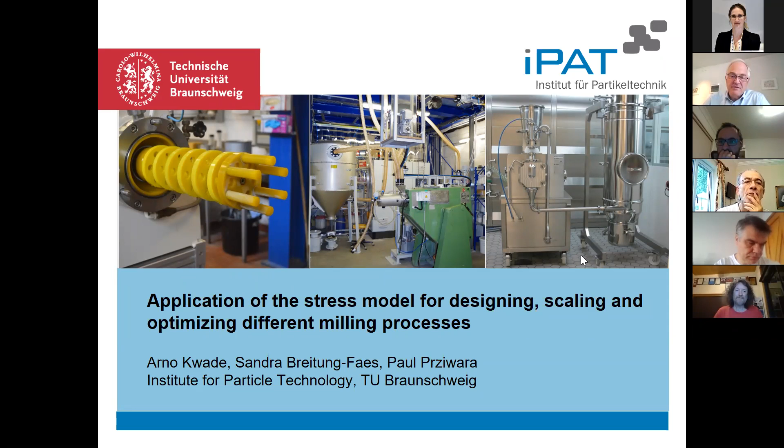And I think more work on maybe single particle stressing, more on population balance modeling and so on, that maybe I will present in the future, mostly also connected with this stress model. So that means today I want to say a few words. I think it's not something special, but as an introduction to energy efficiency and production capacity. Then I would like to present shortly our mill-related stress model, and then how this can be applied for scaling rotary impact mills. That is a work by Michael Junke together with some students of us.

And then we come to the product-related stress model, and also I have two examples there how to use this one. One is for what we are almost always doing, using wet stirred media mills, and predict the result. But also I want to show you how to optimize dry ball milling processes. It's more or less also a stirred media mill in this case, but we also have done some work with normal ball mills, or we're doing it very intensively in the moment. But I think the most complete results we have for this vertical ball mill with a stirrer. And then I come to the conclusions and the outlook.

Now, a few words to start. Sometimes, I mean, it's not so much in mineral industry, but in other industries, it's important to explain why it is really important to increase the energy efficiency, and that means to decrease the specific energy consumption. And it's not only because we want to have low energy costs, it's also because if we keep the power consumption or the power input of the mill the same, we can have a really high production capacity, like shown by this equation here.

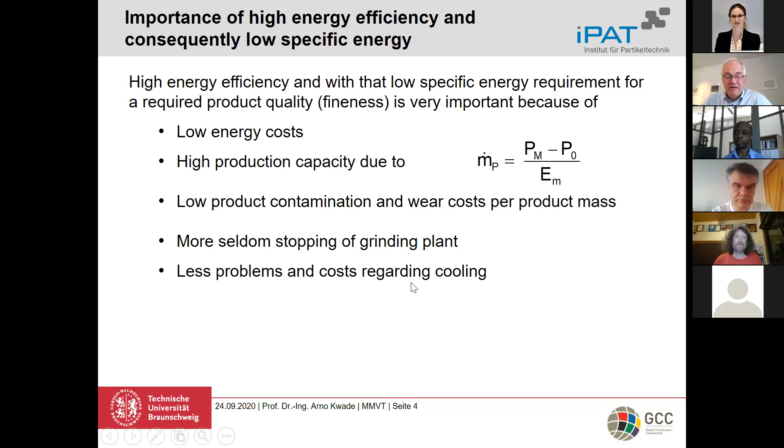So what is the energy doing, or what is the flow of the energy from the motor at the end to our product particles? If we put the energy into the motor, first of all, some of the energy we lose in the drive system. Usually we measure that by the so-called no-load energy or no-load power. It's called here energy, but usually the motor is given some power, and power times time is energy. And so this is something what I think very often is not really looked at, but maybe from the machine supplier side, that should be also something which can be optimized in the future to decrease our CO2 footprint.

So that is then the energy which is really going into the mill chamber, and this energy which is in the mill chamber now is not only used for really stressing the particles. A lot of the energy, especially in fine grinding, is used for the transport of the product particles, for resistances, also friction inside the chamber, and also maybe deformation and wear of the parts of the machine.

So only a certain part is really transferred to the particles. And this part, for example in a jaw crusher, is much higher than in a jet mill or an impact mill, where we have very small particles. Then the question is how this energy, which we really transfer to the particles, can be transferred into a fine product with very high specific surface, for example.

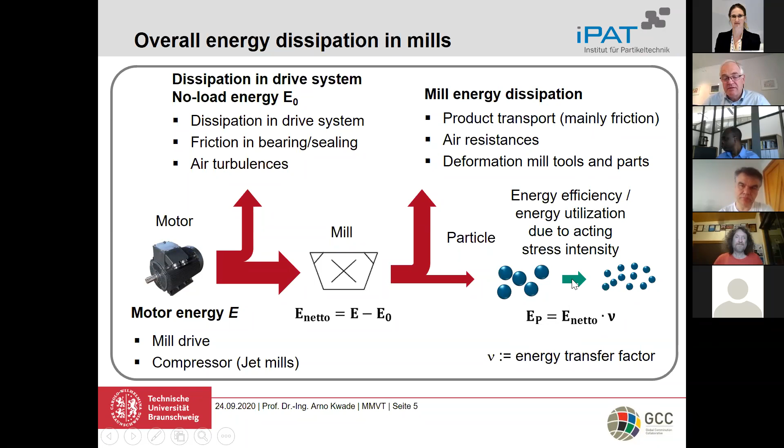Very important is the stress intensity, because this stress intensity decides how effectively we can use this energy.

One example - there are a lot of old results, not new at all, from Schönert, Schubert, and other colleagues, King and so on. They measured single particles with different stress intensities by compression and also by impact. Druck means compression, Prall means impact. You see that the energy utilization - the energy as specific surface increase divided by the energy used - is higher for compression than for impact, and it depends on the particle size and also on the stress intensity. So energy utilization depends on the kind of stress, the stress intensity, and also the particle size.

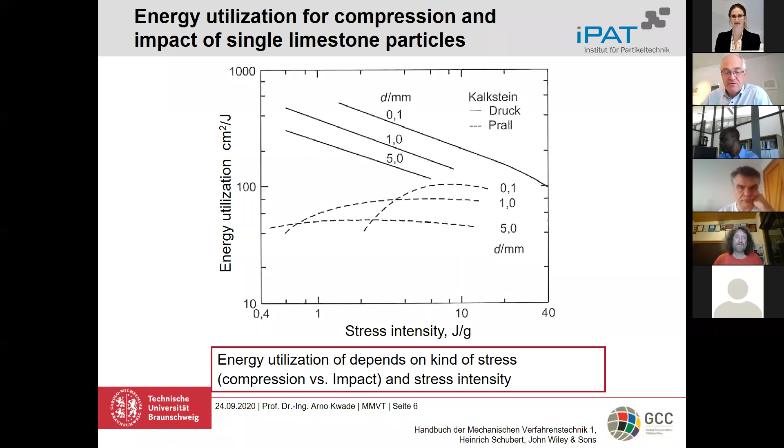I think this is a very basic and important starting point. And then I come to the mill-related stress model.

What's important to say is that this model is not only valid for wet stirred media mills, where we mainly used it, but I think this model can be used for all kinds of mills, because every mill has something in common: we have individual stress events, and in each stress event we stress particles with a certain kind of stress and a certain intensity of stress.

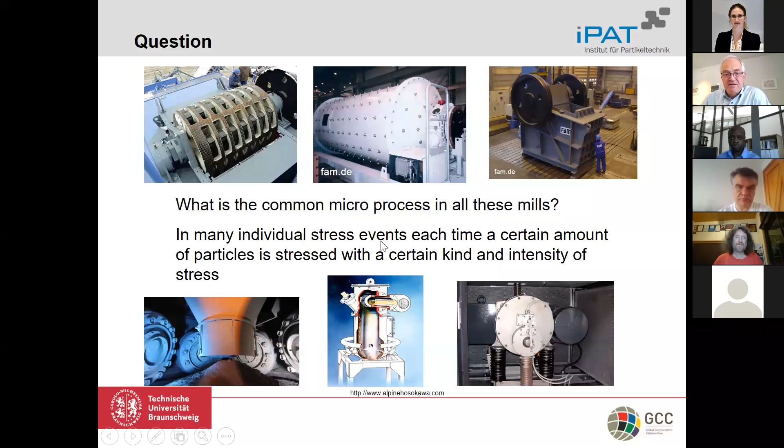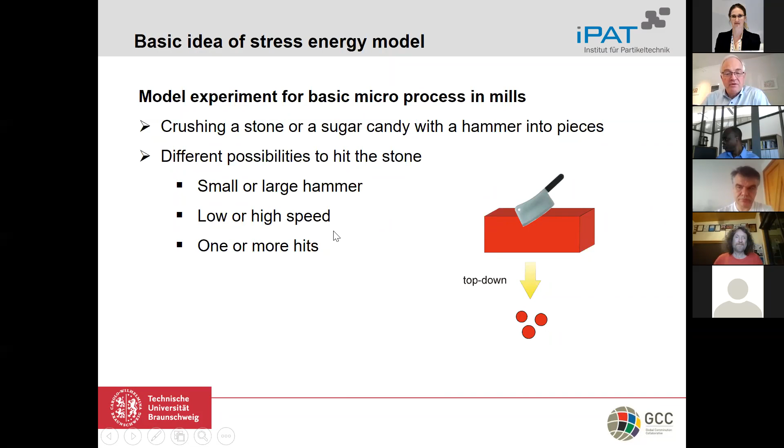So we thought it could be a really simple model experiment. We have one particle, we have a hammer or something like that, and then the question is how we stress the particle. Do we do it with high energy or low energy - meaning a small or large hammer? Do we do it with low or high speed? This also changes the energy. And do we only do that once, or maybe more often, maybe also with less energy per particle? All that decides, in the end, how efficient we are in our comminution process.

To have a closer look, we said maybe we should have two different views on the process. One is from the mill - what is the hammer doing, or what is the mill doing, how often we stress a particle, meaning the frequency of strokes or stresses, and how strong are the strokes, meaning the force or the energy in this case of the hammer, inside the machine.

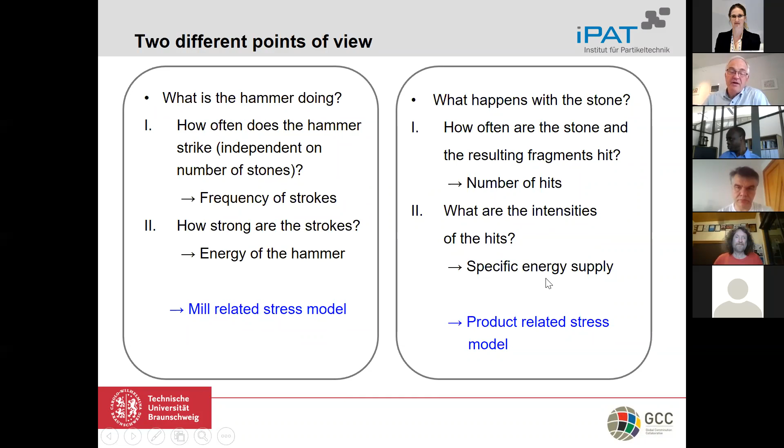And on the other side, it's how we do that, or we have a look at the product - what is coming out and what stresses are acting on the product. That means how many stress events a certain mass of product has achieved, or the number of hits on a certain particle and its fragments, and what the intensities of these hits are. Intensity always means energy per mass of particles which are stressed - something like the specific energy in a single stress event. We call that the product-related stress model.

So coming first to the mill-related stress model, which I think most of you know. We, or others like Schönert, said the type of stress is very important, then the stress frequency - how often stresses or stress events act in a mill. For example, in a jaw crusher it's very seldom; in a rotary impact mill it's very often. Then the stress energy, the energy we can provide to the particles - this is independent of the particle size and the material in the mill. It really only describes the operation of the mill.

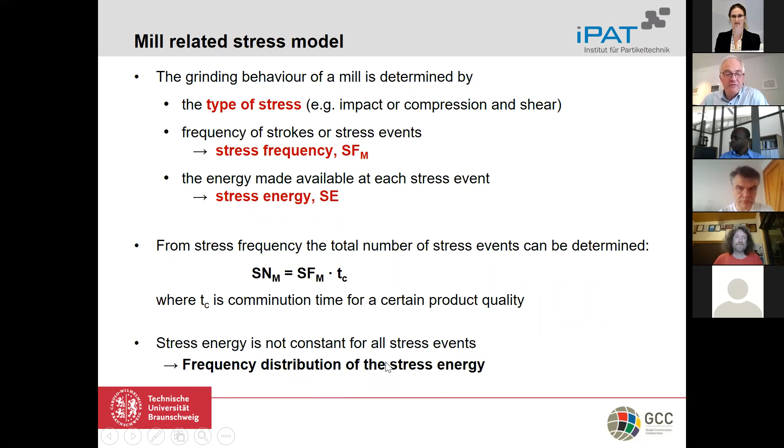The best we can do is use a frequency distribution or a cumulative distribution of the stress energy to describe the behavior of such a mill. That is such a model distribution - you have a frequency distribution of this stress energy.

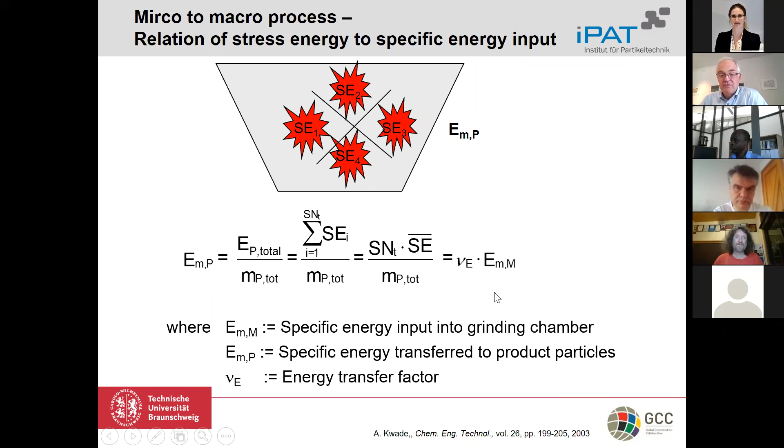Okay, now how can we use it? There's a sample - I like this example because it's relatively simple. Michael Juhnke from Novartis, I think maybe some of you know him. He gave a plenary lecture, I think at ESCC last time, or at least in our circle, but he is also very active in the comminution field.

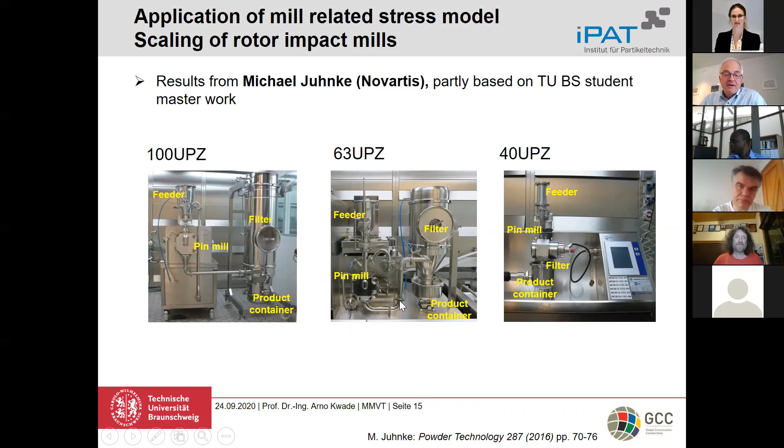His purpose at his company was how to go from small mill devices to predict the result, or how to operate the large production mills - large for the pharmaceutical industry, though still very small for the mineral industry. So the question is how to do that.

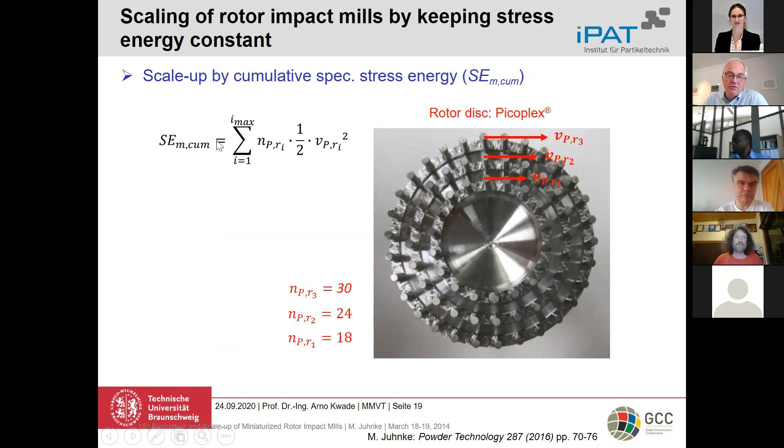So that means we need a better description, the full stress energy distribution. But then he calculated a mean value from this full distribution. He counted the pins, calculated the stress energy for each pin, multiplied it, and came to this mean or cumulative value for the stress energy.

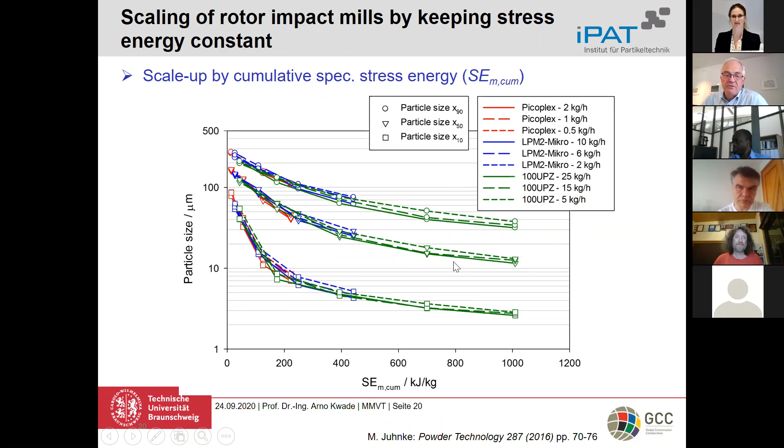With this energy, he correlated the curves and got much better agreement. But then he said, to operate the mill with these different stress energies, you need different tip speeds, 129 meters, 118 meters per second, and this gives some other problems. So he talked to the manufacturer, for the Hosokawa Alpine, and they redesigned these rotors.

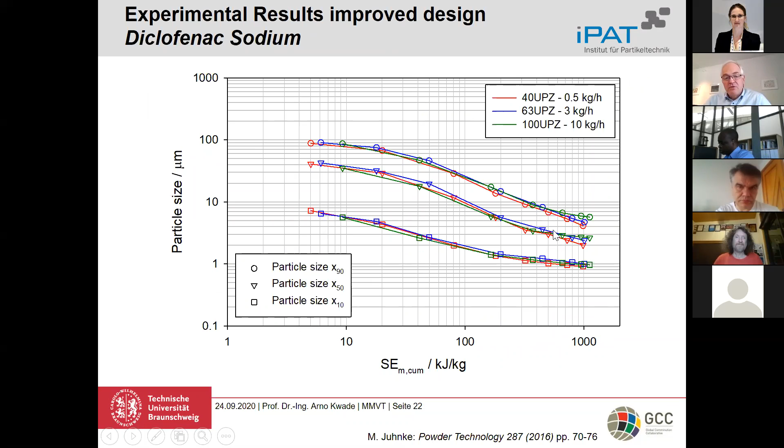So that at the end the tip speed is very similar in the three mills, to get the same mean stress energy. With that, you get even much better correlations for the three mills. Now he has a really nice tool, to run with a very small mill but predict what happens for larger mills.

Okay, coming to the product-related stress model. In this case, we now relate the frequency of stresses to a certain particle, so we have the stress number per feed particle, and we relate the stress energy to the mass of the particle, or force to the area of the particle. So we come to the stress intensity.

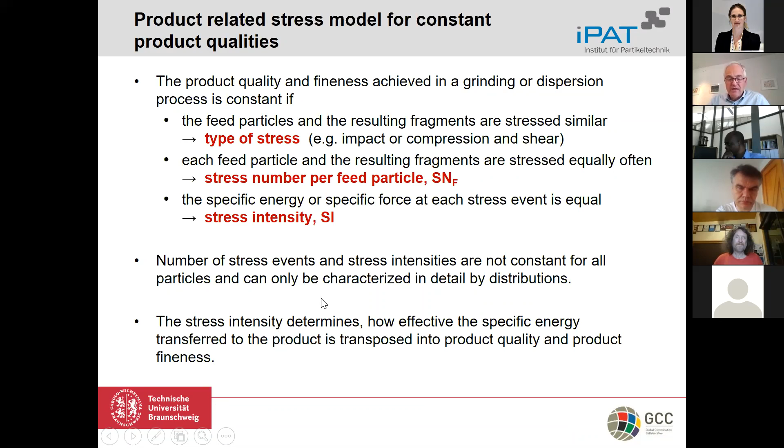These are two related characteristic values, but again we have a distribution of the stress number per feed particle. Not every particle gets the same number of stresses, and the stress intensity also has a certain distribution across all the stress events. In the following I will work more or less with characteristic values. The stress intensity determines how effective the specific energy is transferred to the product, as we've already seen regarding energy utilization in the basic investigations at the beginning.

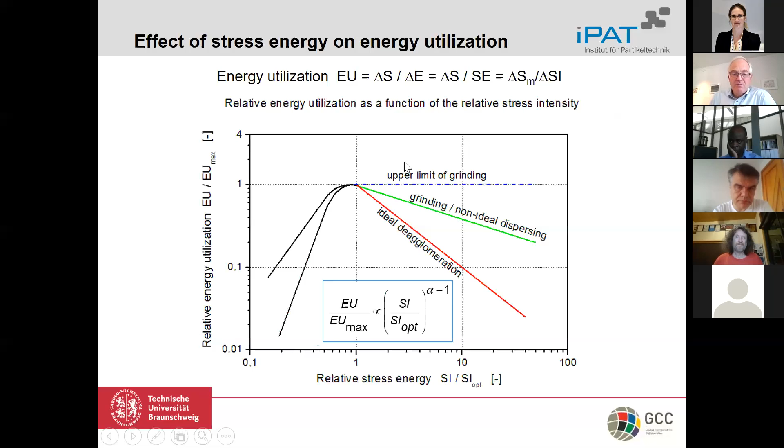We have the maximum energy utilization, and then we have a decrease. So that means we should operate our mill maybe a little bit higher than the optimum stress intensity to have a really nice or really high energy utilization. This was also found for other materials, also from basic research.

These are two figures I got out of the Handbook of Powder Technology, which are results from Schönert and Rumpf, and also from Unland. They all could show that the energy utilization depends on the intensity in case of an impact milling. And in this case, this is for a compression of a bed. You also get a certain maximum energy utilization depending on this stress intensity input.

That means there is an optimum that we want to find and which we want to use at the end, to get the minimum of specific energy, but maybe also the maximum of throughput and so on, like I said at the beginning of my presentation.

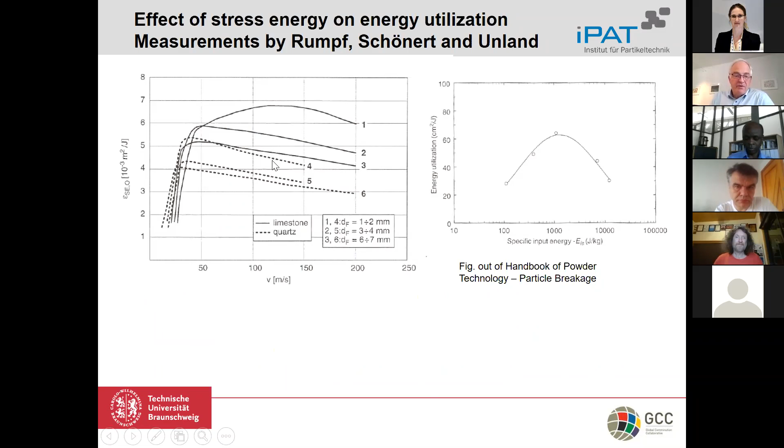If you use this relationship shown here, then you can also transfer that into a relationship with the specific energy, because we want to have usually the same product quality with a certain process. That means the specific surface increase would be constant. And then we come to this equation where we say that the specific energy divided by a minimum specific energy should be a function of this ratio of the stress intensities.

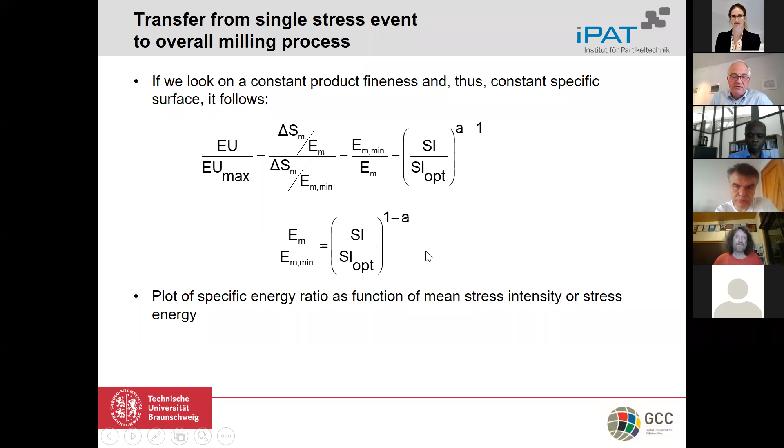Now for, in this case, our stirred media mill, as an example, the stress energy can be determined by the kinetic energy of the beads, which is a function of the volume of the beads and the density. And the volume is a function of the size of the beads to the power of 3, and also a square of the tip speed. So it's a very simple equation for the kinetic energy.

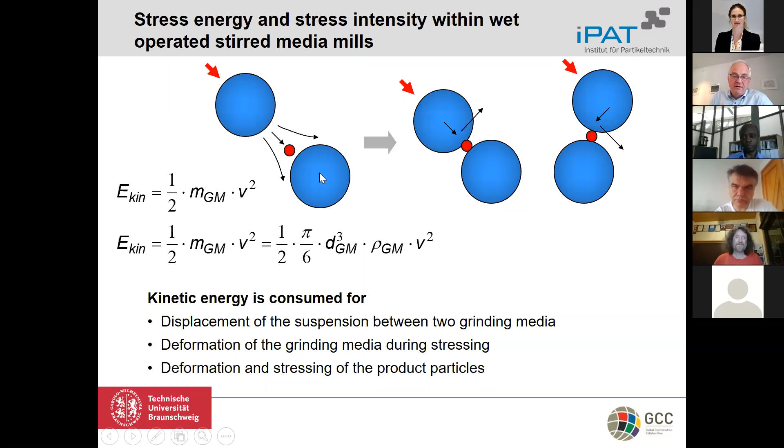This kinetic energy is usually used for the milling or the stressing of the particles, but also for the displacement of fluid or what we have between the beads, and maybe also more or less the deformation of the beads itself. Now if we assume that there's no deformation of the beads, and that the displacement of the fluid can be neglected, then we can say that this kinetic energy is decisive for stressing the particles.

What I'm showing here is results from 4 different experiments where we kept the stress intensity or stress energy almost constant. What we can see is that if we want to have a certain particle size, we need a certain specific energy, even if we change the density of the balls or beads, the size of them, and also the tip speed, we get the same specific energy.

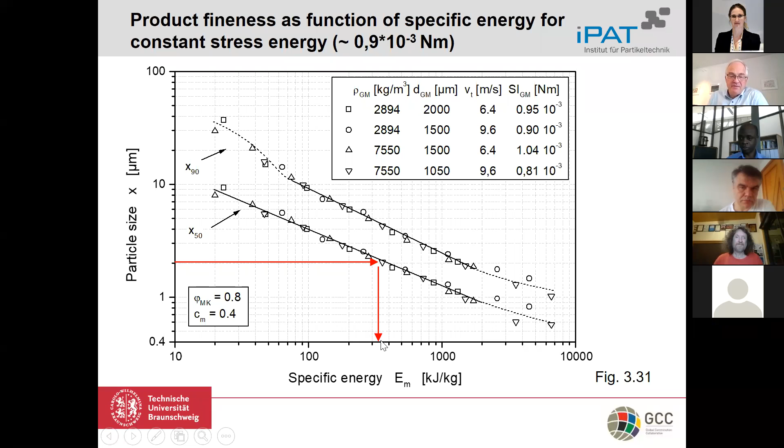Now, if we plot the specific energy as a function of the stress intensity, then we come to this plot which has this optimum curve, which I think is almost always shown.

What we want to do is now to work in this region here where we have very small specific energies. As I said, this is in this case only valid for the case that the media speed is proportional to the tip speed, that the stress energy can be a measure for the maximum energy, and that we don't need the full distribution, that only one particle is stressed significantly. So that means the stress intensity is almost independent of the size of the beads.

I think this is why we are very lucky for this wet milling. I will show you later the case for the dry milling. There we have to consider the mass between the balls, so that is then not so easy like it was here for the wet milling.

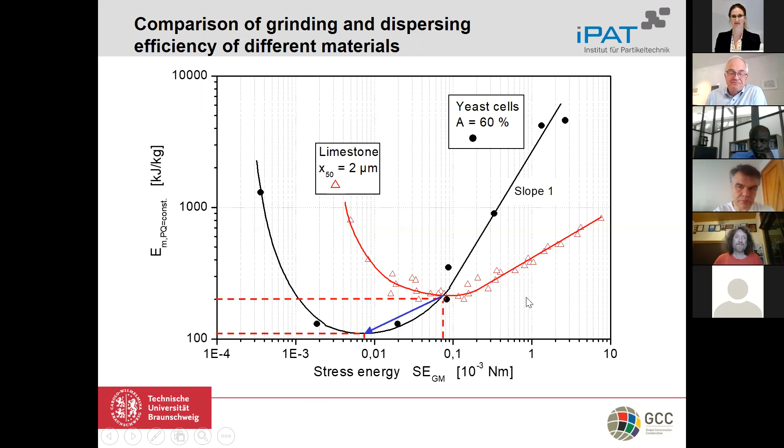Okay, now how to use this model. I will proceed with wet stirred media milling, and then come to dry ball milling. I think I have to hurry up a little bit to be in time at the end.

For stirred media mills, what's nice is that you have a lot of different designs. I think most of you are coming from the minerals industry, so you really know the ISA mill, shown here. But there are also vertical mills on the market, increasingly in the mineral industry, and other very specialized mills for pigments or other ceramic materials. The question is, what is the grinding behavior and efficiency of these different mill designs?

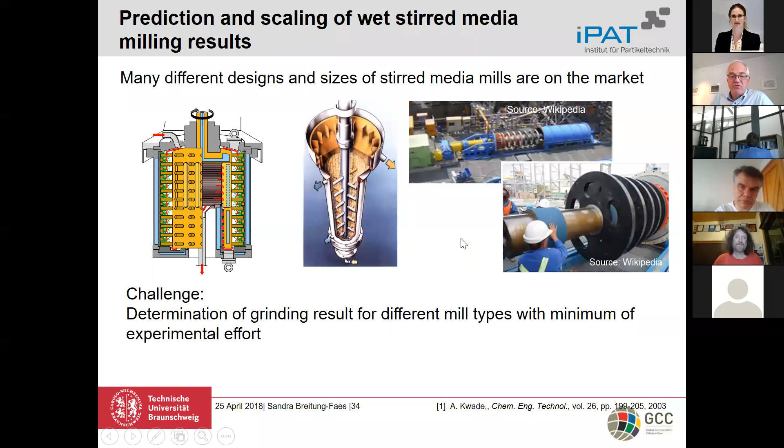You can run experiments all the time, but then you may have the issue that you can only run the experiment in a small mill, while you want to know what happens in a really large mill like this large ISA mill. So you also have to predict the change with geometry. How can we do that with a minimum of experimental effort?

What we usually do is first estimate the distribution of our stress intensities, that is, the stress frequency for different stress energies, but as a cumulative function in this case. From that we can define a median value or also a mean value, and we use this for describing the effect of the different mill designs.

If you want to do it more exactly, you need the full curve, and then you can do it by population balance modeling. We have also done that to get a full particle size distribution at the end, but here we will do it in a simpler way.

We found that there's a certain factor for the mill describing how the mean stress energy depends on the mill size or mill geometry. If we have the mean stress energy, we can also calculate the stress intensity.

We found that for very high solids concentrations, we also have to consider the mass between the beads, so it's not so easy that we can use only the stress energy.

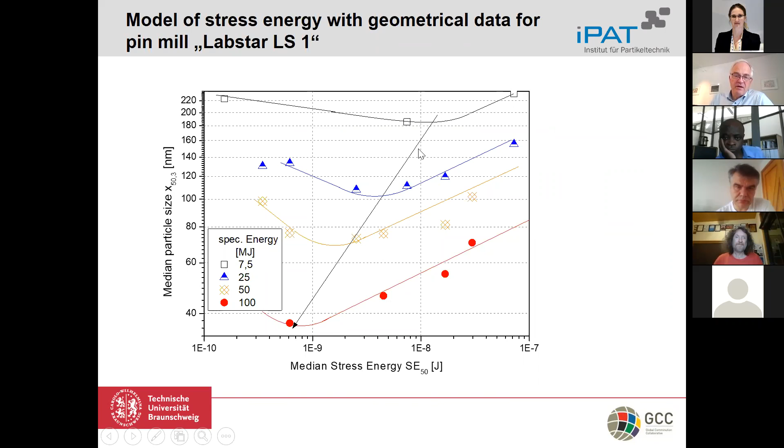Then we plot, so from here you get the optimum value, that's always the minimum. We said, okay, that's the optimum value. This optimum value is then plotted here on the x-axis, and we said at the optimum stress energy, what is the minimum, or the median particle size we got at this point?

Then we plotted this for the different materials. We found that we get a nice correlation for zinc oxide and alumina in this case. The question was, can we define a certain parameter so that we are always on one line, meaning we can calculate in advance what the optimum stress energy is?

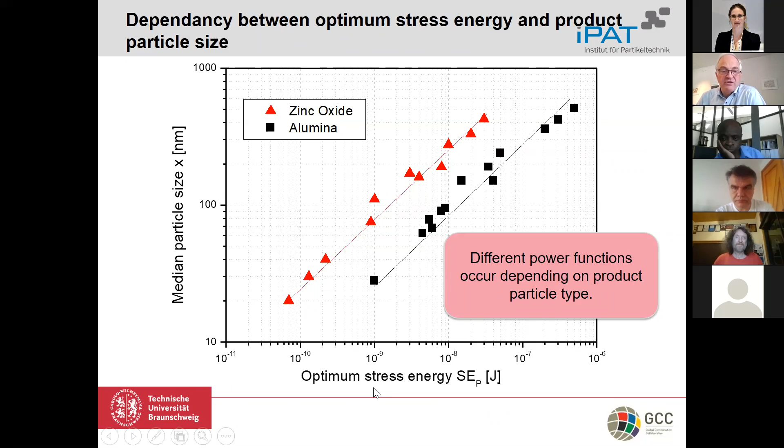Sandra Breitung-Fäß looked into this—we did some work together with Peukert on the grinding limit—and we found that this depends on a size x min, as we called it, and this x min depends on some other material parameters I'll show on the next slide. It can also be estimated that it depends somehow on the global compression strength of a material, if it's really large, not depending on the size in this case, and on the size of the particle.

So we said, okay, the energy which we transfer to a certain particle divided by the strength of the particle is the stress energy divided by the volume of the particle and the density—but we simplified it. It's a proportional sign here, sorry.

Times 1 divided by the strength of this material—this is always the stress intensity divided by the strength. So that means how much higher is the stress intensity compared to the strength of the material, and this was a function of the x50 value divided by the x-min value.

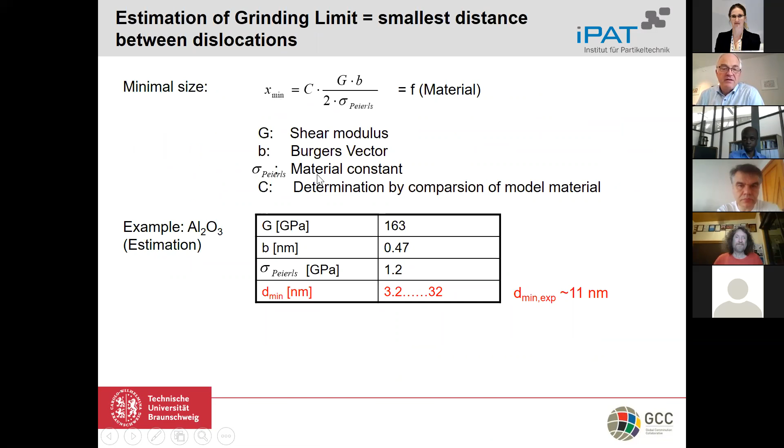This x-min value is the minimum particle size which can be achieved. That depends on the shear modulus, on the Burgers vector, on certain material constants, and what was done in this joint work—there's a publication where you can have a look at it.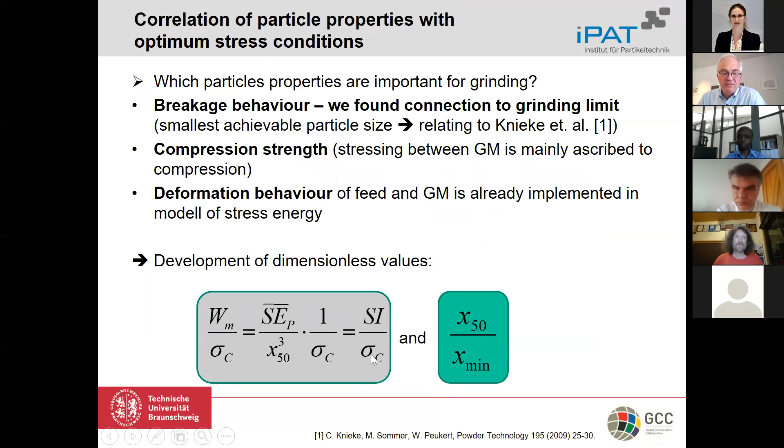But for us, it's better to have the strength on the other side. That means this one was then shifted to the other side to determine the optimum stress intensity, and this is this curve. You have the optimum stress intensity as a function of the maximum global strength of the material times this minimum value to the power of 3, divided by the size we want to have to the power of 3. If we plot that, we get this straight line. So it's somehow a global curve.

And also, if we calculate the right stress energy distribution, then we can use it for different mill designs and mill sizes.

Okay, so that was very nice. So by knowing the material properties, now we can decide what is the optimum stress intensity. This should be not only valid for stirred media mills, it should be valid also for other mills, but we haven't really checked it. It's ongoing work.

And this compression strength, we found that we can also use to estimate this minimum particle size—it's only an estimation, not very precise. Then you have to also get all the material parameters I showed you before, but from first estimation, I think this line worked nicely to get this x-min.

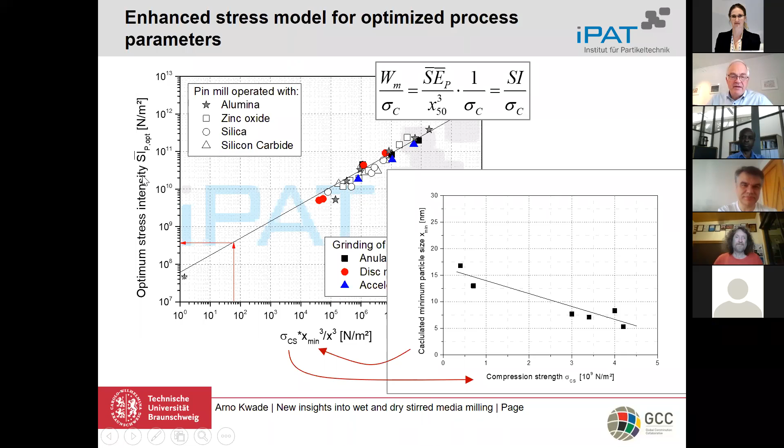Okay, so that was one very nice curve, and then we thought about, for this optimum stress intensity, we should need a certain number of stresses to come to breakage at a certain fineness, you know, normally maybe only once.

And this turned out also to be a nice correlation. So depending on this optimum stress intensity to achieve a certain fineness, each optimum stress intensity means also a different fineness at the end—you need a different number of stress events, and this was also one line for different materials and different mill types.

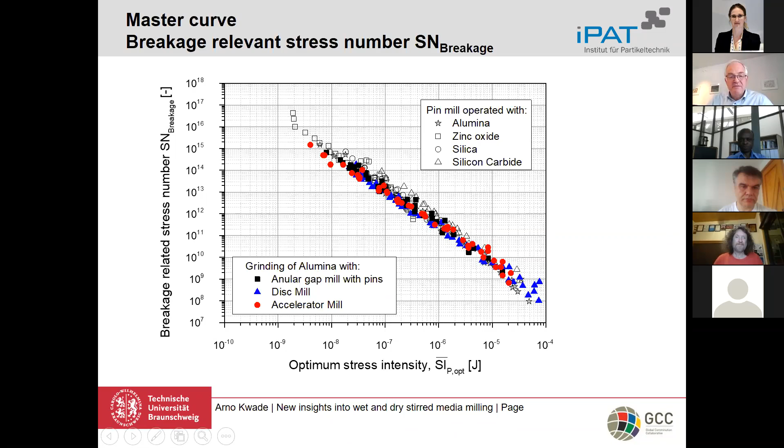So we have two master curves, and with these master curves, at the end we can calculate the stress number for a new operation mode or operation point. So this is the breakage number for the optimum point, this is the optimum stress intensity, and this is then the stress intensity for the new operation point.

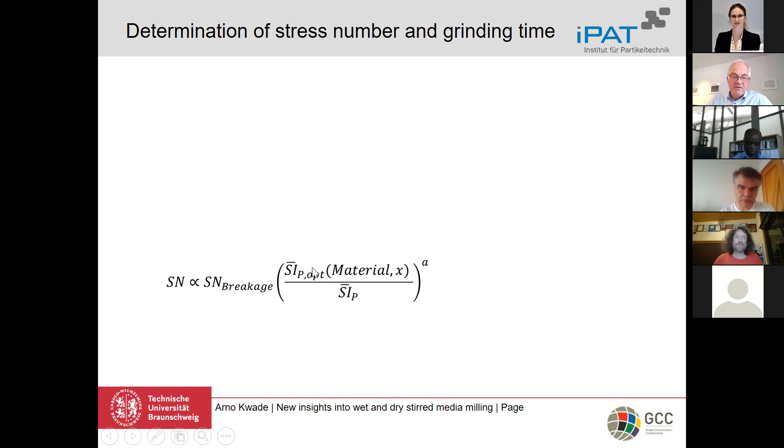So how can we use this equation? We can first determine this optimum stress intensity, like I've shown you by this curve here, with some more points in this case, based on this overall strength and so on—so one direction.

Then we can use the second master curve to determine this breakage number for this optimum point, and then we can put in the stress intensity we want to have a look at. We still need this factor alpha, the power of this equation, and we found that this depends on the Young's modulus. Otherwise, you have to run an experiment to find that out.

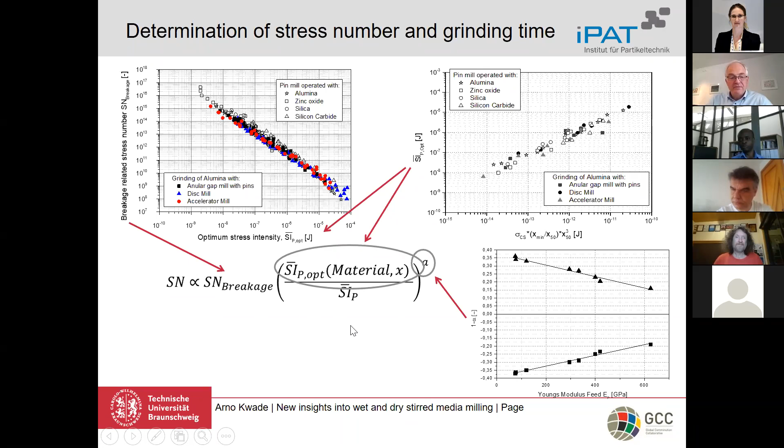With this stress number, now I cannot show you everything because then the time is over, but we can now determine the stress. We can predict the grinding time and also the specific energy consumption. This procedure is shown here: first, we determine by the geometry the stress energy distribution.

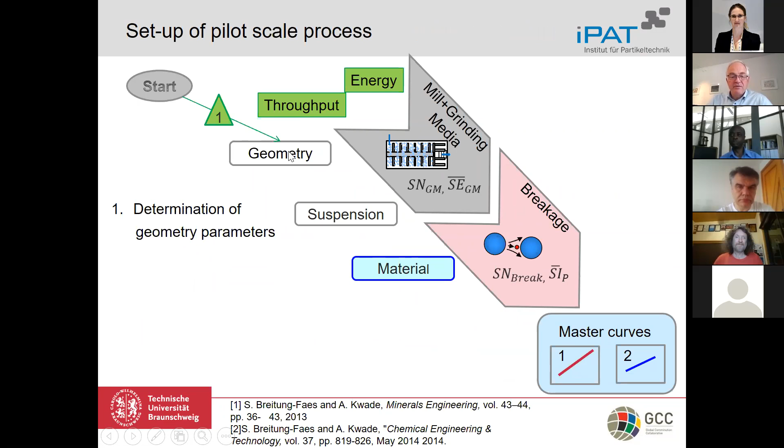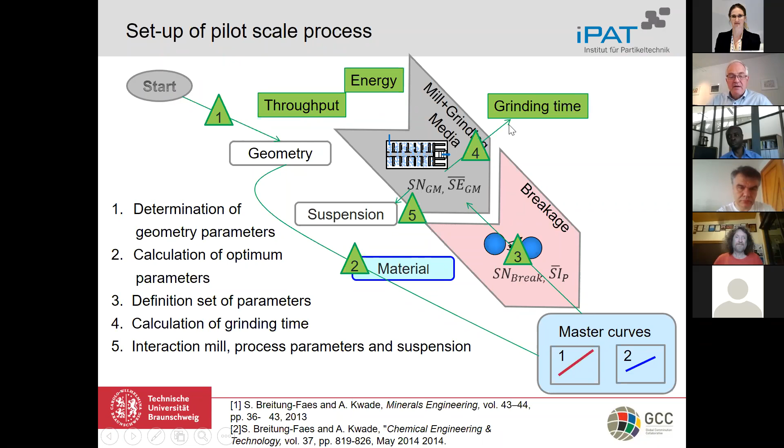By the material parameters, we come to the master curves and can determine the optimum stress intensity. From that, we can get the number of stresses we need. And then we can calculate the grinding time and also the specific energy consumption.

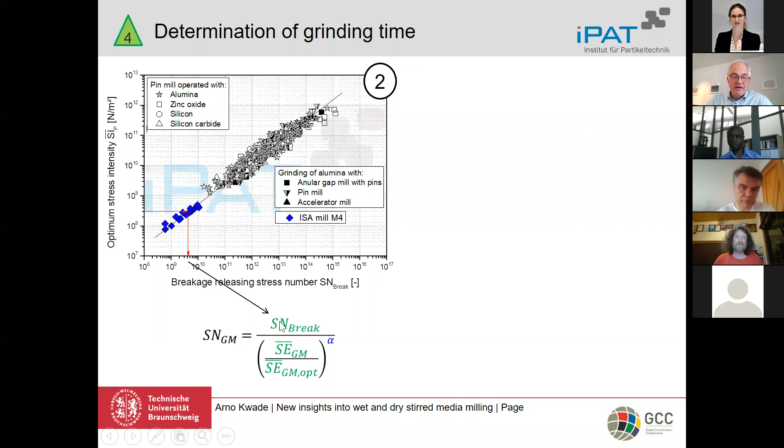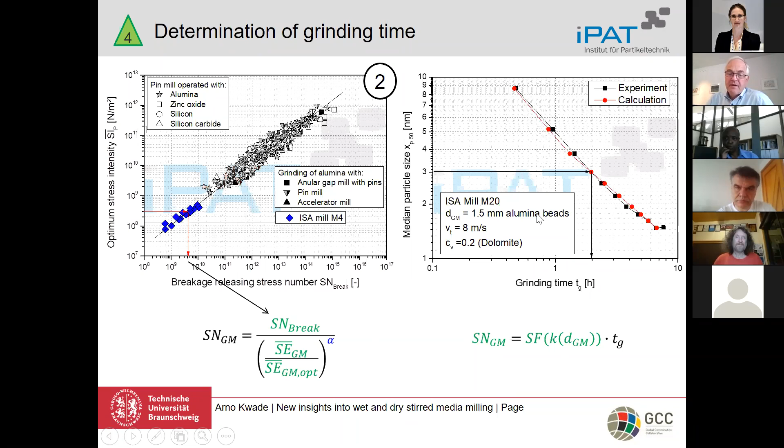Then we can determine the breakage number, or the number of stresses, with the second master curve, and then determine the grinding time by this correlation. This was really in line with the experiment—this is the M20. We didn't make experiments or use experiments here for the prediction; it was only calculated based on this master curve, and we got the M20 results really nicely.

We can also predict the specific energy consumption, but then we need some information on how effectively the energy is transferred to the grinding material by the beads, with this factor, and also whether there is some damping. It would be too complicated to explain now how we did that, but it works.

But I'll show you more in the following. It's on stirred media mills, work done by Paul Przwara. Maybe some of you know him, but he is now in industry working with stirred media mills—now with wet stirred media mills.

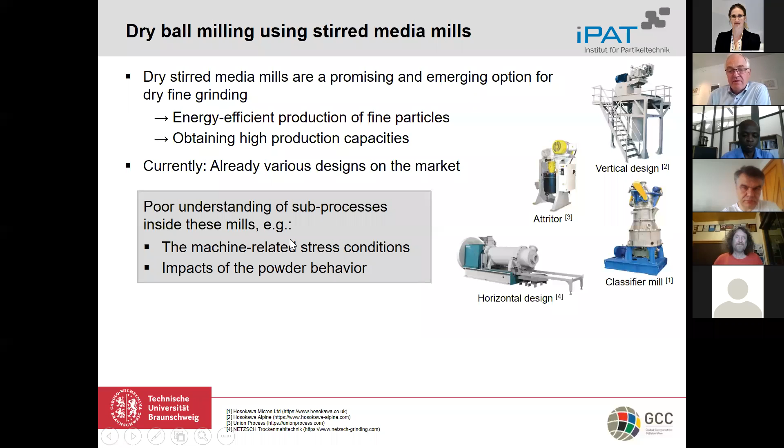What he was doing was to also have a look at dry stirred media mills and how we can optimize them, but also how we can predict the fineness of different operations of these mills. Up to now, when he started, there was a poor understanding of what really happens in such mills and what the stress conditions are, how power is transferred to the material, and so on.

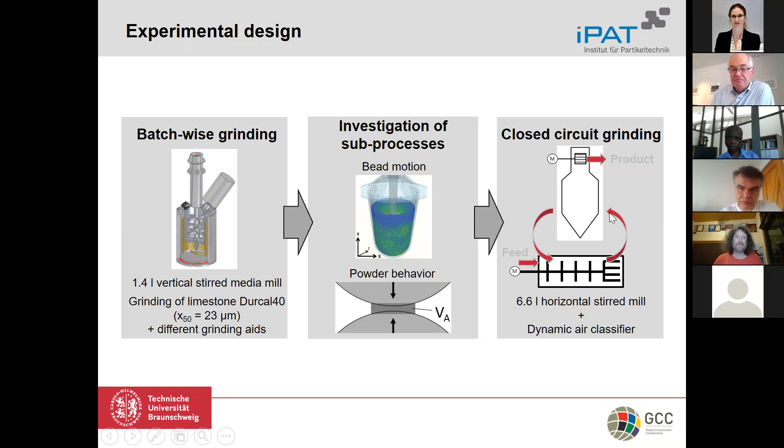We started with this smaller batch-wise vertical mill. Then we had some investigations of the sub-processes, what happens really between the beads, and at the end we came to a pilot line or pilot-scale closed circuit grinding. I think because of time I'll skip this in my presentation. I only wanted to show you the results with the vertical mill, because it's really nice to show how the stress intensity has to be calculated and how we can use this in this case.

So for different tip speeds and different grinding additives, we get different results. This is one grinding additive, heptanoic acid, and depending on the grinding additive, we get different flow properties—that's shown in the next slide. If you use a different one, like glycol in this case, we have a much higher particle size, so we need much more energy to achieve the same fineness.

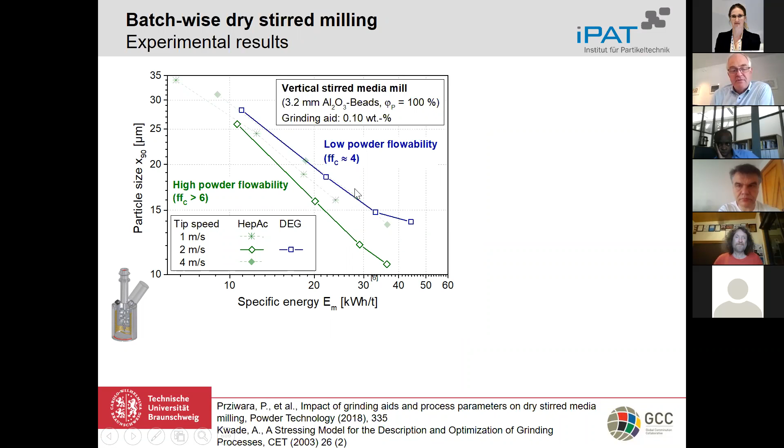In another mill, it can behave differently, so powder flowability is very, very important. I think he did a lot of very nice work on that. We also just published a review, for example in Powder Technology, on all the work done until now—I think it's important for dry milling in such ball mills.

Then he said, okay, let's try what we did for wet milling—use this simple equation for the stress energy, knowing it probably doesn't work, but first have a try. In this case, he wanted to produce a 20 micron X90. So he looked at the specific energy and plotted it as a function of this term, and you see it's not a nice curve—the points are all over. So that doesn't work. Now the question is why.

There can be two reasons. One is that the stress energy may not really be defined by this equation. The other is that there's a certain mass between the balls or the beads, and this mass changes with the size of the beads and also maybe the flowability of the product, and so on.

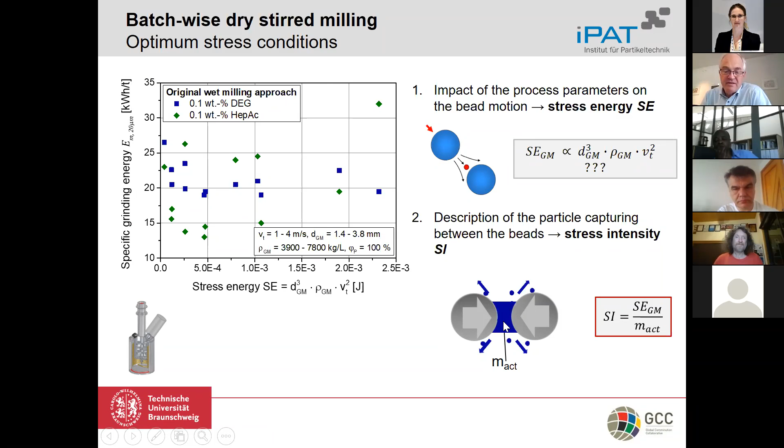So to achieve now the stress energy, he was running DEM simulations so that we get this contact speed, the stressing speed. And then he also ran some tests in a model device to get a certain knowledge about how much material is captured by the balls. So he runs his DEM simulations using EDEM in this case.

We did a really good, let's say, parameter calibration, so that I think the results should be more or less correct. Also, the power draw was very close to the experimental one.

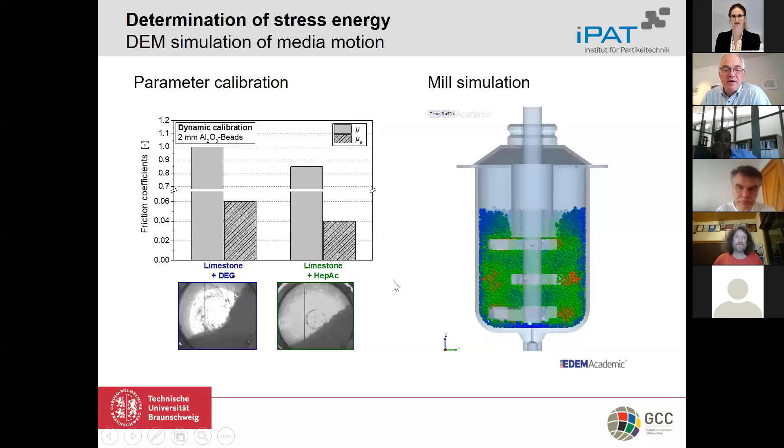And then he calculated, for example, also the density distribution for the stress energy distribution, showing that for the vertical stirred media mill, there are differences depending on the grinding aid, and that the normal and tangential stress indices are very similar.

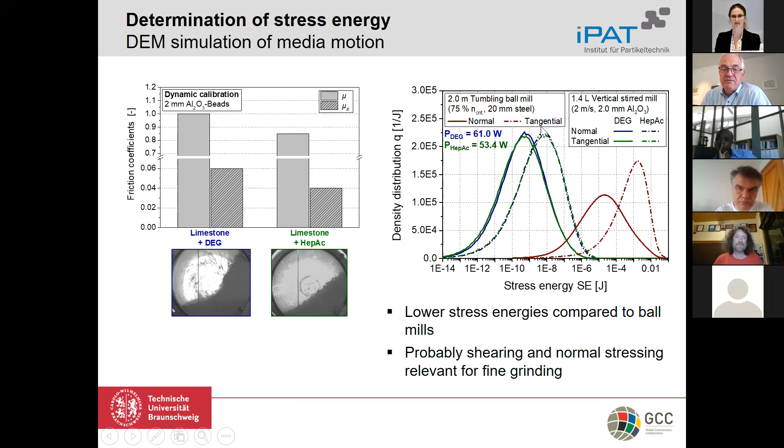In ball mills, it was different. So if we calculated for a bigger ball mill with 2 meter diameter, we have much higher stress energies in this case, and also we have differences between tangential and normal direction.

But what is most important is that he was now looking for the contact velocity of the beads and how this depends on the stirring tip speed, and he found that it's a complex correlation, and this depends also on the grinding media size and the grinding media density. So it's not so simple that this is proportional to the tip speed, independent on the type of the balls.

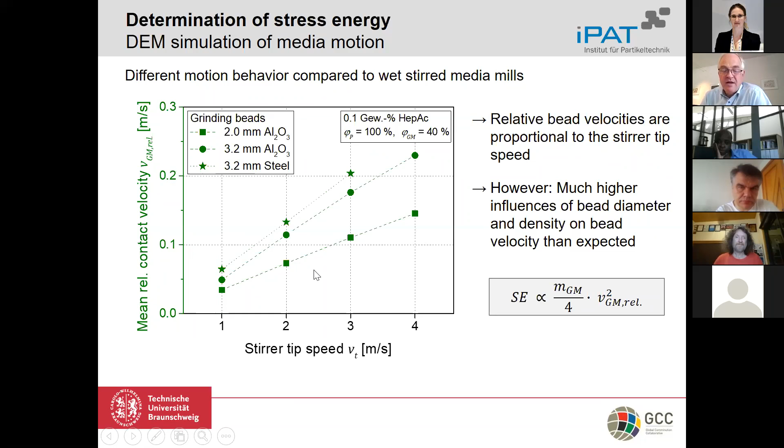So then he used this more complex knowledge, and also he did experiments to estimate what is a captured mass here with a flat plate in the ball, but he also did it with 2 balls at the end, because a reviewer said that, and it was a really good idea.

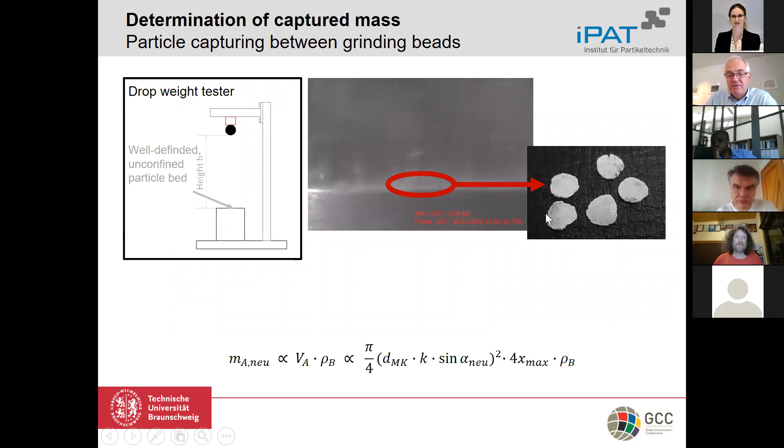And we found that we can now describe this mass. We had these tablets and could really measure the mass of the tablets. We found that the correlation from Schönert is really working good.

And we extended this correlation a little bit, like shown here. So it's very similar. We have another parameter K. So we have this alpha angle calculated in a little bit different way than Schönert was saying. But other than that, it's very similar to the one of Schönert.

And by that, we now could calculate what is the mass between the balls. And then we can calculate the stress intensity, knowing the correct stress energy and the correct mass that is between the balls. And if we do that, then you see that we get nice curves.

So that is the newest plots out of his PhD thesis, which I got a few weeks ago. You see that they really fit nicely for the two different grinding aids. And what can also be seen is that, depending on the grinding aid, we have a different minimum specific energy.

So in this case, for the heptanoic acid with a higher flowability, we get a lower specific energy at the minimum than for the other one. And also the optimum stress energy depends then on the flowability of the product, because the mass between the product changes. So we have a little bit smaller value for this one than in that case.

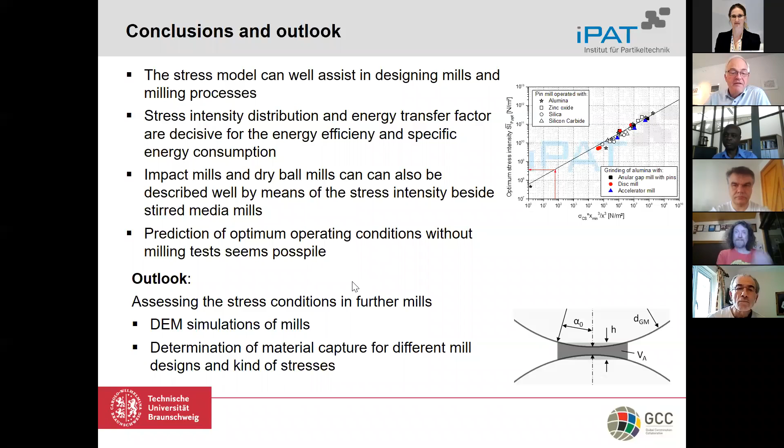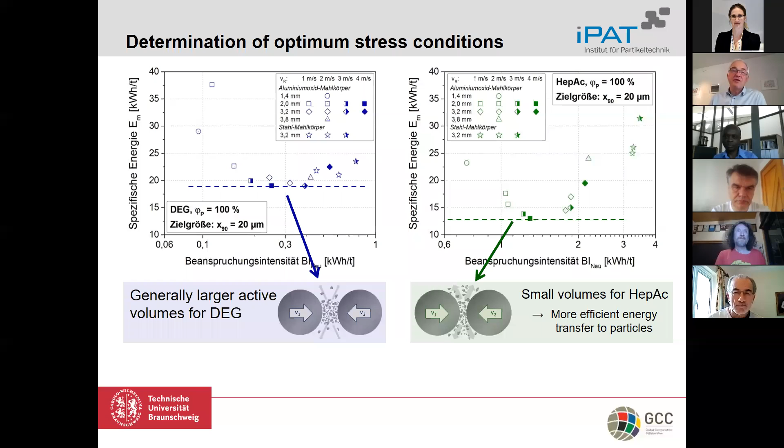Yes, sure. Then you are normally on the left side of the optimum. Maybe I'll go to this result here. Then you are here somewhere, and you are not efficient to break the particles - like energy utilization, you are not at the point where in most stress events you really break the particle. You maybe achieve some small failures in the particle already, but it's not really breakage. And normally if you have to do that several times, then you lose energy, or dissipate energy, and you don't get a good result very fast.

So the best point is really to hit the particle once with the energy where it just breaks, and then if you want to go finer, take the exact energy needed for the fragments so they just break, and so on. So that would be the optimum. I mean, you can't usually do it in a normal mill, but that would be the thinking if you want to go to better processes or better mill designs - that's how to do it.

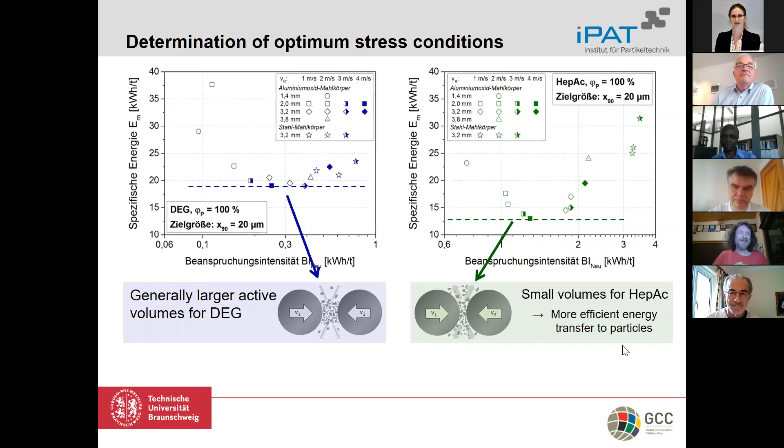So one thing we have in mineral processing is a really wide size distribution coming in, and then you need a whole lot of different stress intensities. I think that's a distinct challenge, when you have a system that's got a distribution. Yes, right, I think that's what I just mentioned - if you come to this point, then we need a population balance to calculate that.

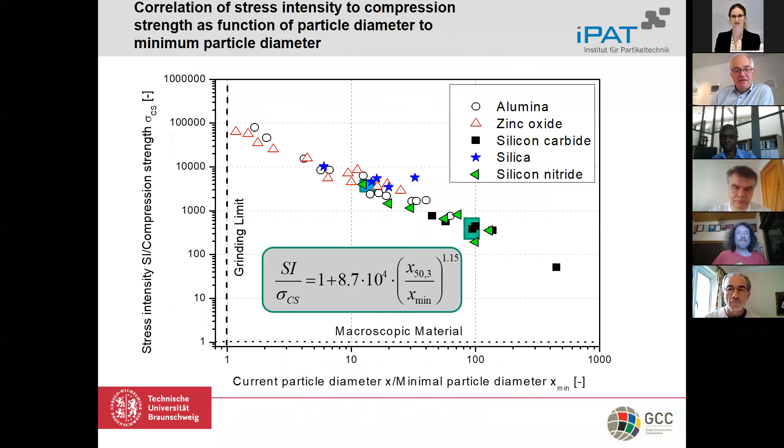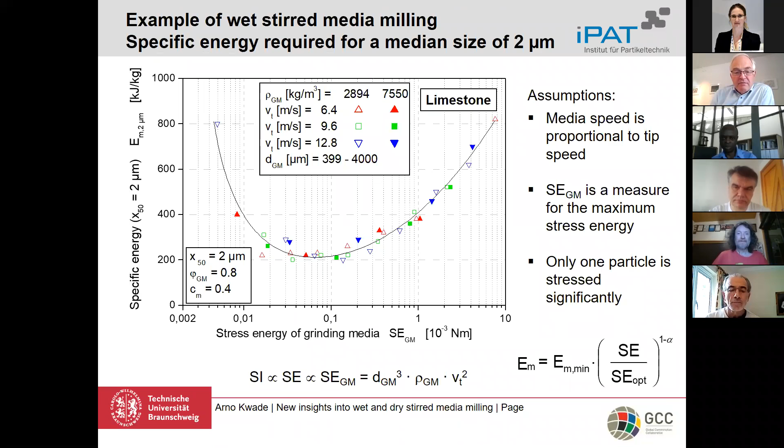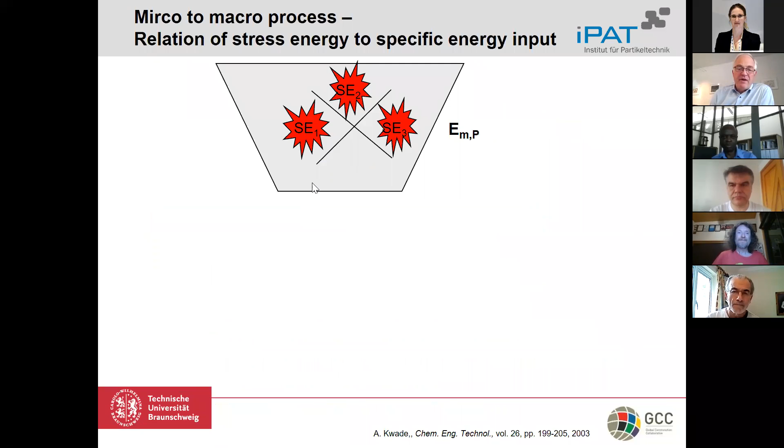So what Greta Fangier has done - unfortunately I don't have her PhD thesis yet - she coupled the distribution, like I showed here in principle somewhere at the beginning, with a population balance. Then it gets more complicated, right? But at the end you can come to a correct result. And I think you don't need the entire curve - I think it's maybe good enough to have some sectors of the stress energy to get a good result.

What we found with the mean stress energy is that the question then is maybe what we have to cut - what stress energies are not important, where we should cut it, and then calculate the mean. That's something we discussed a lot, also with Anderson Chagas, how to do that, or what is the best way to do it.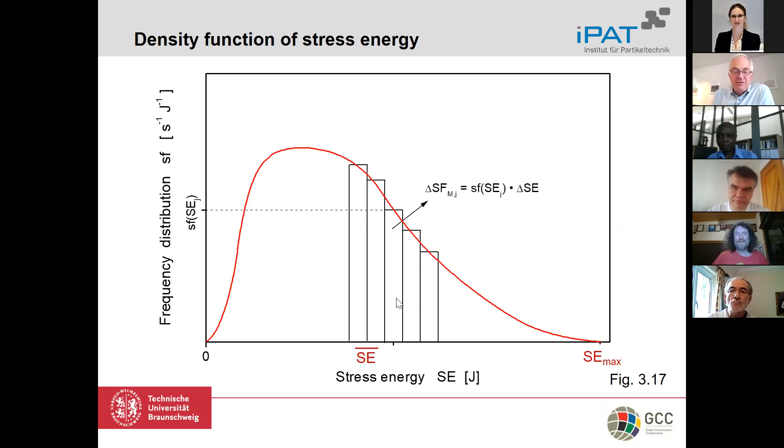Then you get a mean that is really meaningful, let's say, which you can also use to get a certain distribution, because what we found is that the distribution depends on the stress energy. But this is then done by calibrating the population balance - by which mean stress energy you get which distribution. If you want to do it really correctly, then you need the distribution itself.

But for optimizing, very often simpler solutions work.

Okay, Majala, you had a question? Yeah, first of all, thank you very much, Arno. Very interesting talk, good summary of the work.

In your earlier slides you referred to the importance of stressing mode, that is impact, compression, and shear. I wonder how you differentiate in your calculation of the mean specific energy between these modes, because for a given mill you could change the relative contribution of, say, shear and compression.

Yeah, that's a very good question. For the normal application of the simple model, we say it includes both; we don't distinguish between shear and normal stress. Now if we use DEM simulations, we can really get the parts - what is normal stress, what is tangential stress. What I showed at the end for the dry milling, for the ball mill, there was a difference between shear and normal stress.